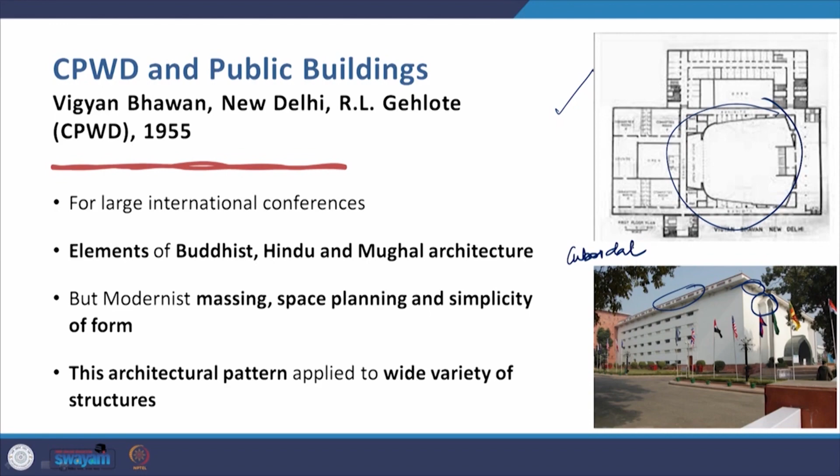So here in this example, the large entrance of the Vigyan Bhavan is actually in black marble and glass, and it's so obvious that it has been derived from the Chaitya Griha, the entrance to the Chaitya halls in Ajanta. So this horseshoe shaped design is directly imitated here, or in a sense interpreted in modern materials to form the entrance of the Vigyan Bhavan, and this single Buddhist element is there in the facade.

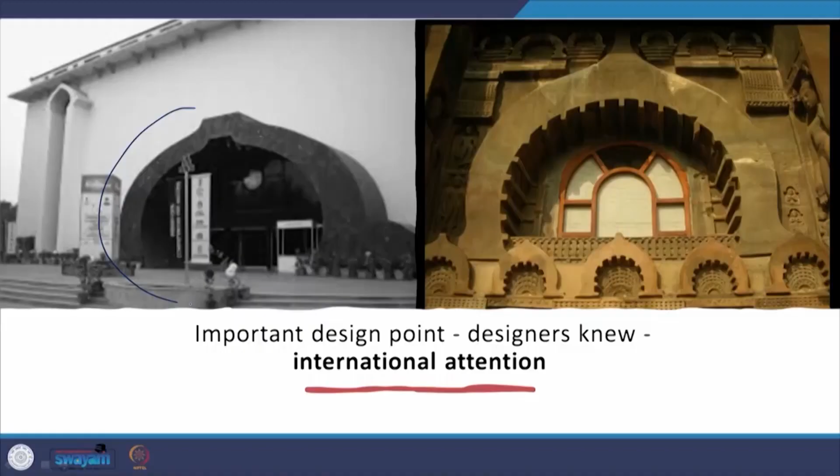Now this is a very important design point, and the designers deliberately implemented it because they knew that this conference center would become a hub for international conferences, and thus it would be able to draw international attention with this very iconic entrance. And so the building is not truly integrated. Its envelope, that is the exterior facade form of the building, is different from its interior.

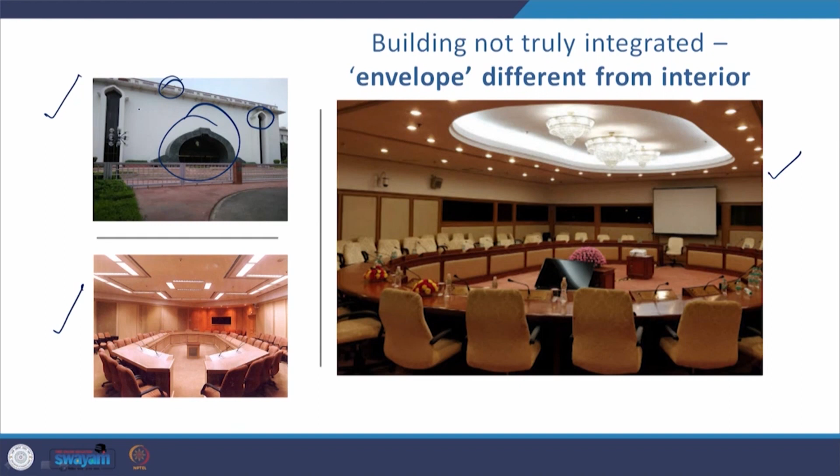When you look at the interior, it is very high tech to meet the requirements of a modern conference facility, but on the outside you have, for example, the entrance way from the Chaitya halls, or the top part of this long fenestration from Mughal architecture, and the jali work here in the parapet and the brackets beneath it.

So they could apply these traditional elements in the facade, but traditional planning could not be carried on inside, because the building itself required a modern spatial organization to meet modern requirements. So there was a disconnect between the way the building appeared from outside with these traditional elements, and what it was on the inside, which is completely modern. True modernism would avoid this disconnect between exterior and interior.

The building would speak the same language both in its form and in its inner space organization and planning and massing. This building speaks one language when it comes to its massing, because the massing is modernist. It is a simple cuboidal mass to the extent that it is a white planar cuboidal geometry, but then it has these traditional elements attached to it, and it is using conventional materials that have been used to erect this building, because such a large conference facility or an auditorium is simply not possible without frame construction, in this case RCC.

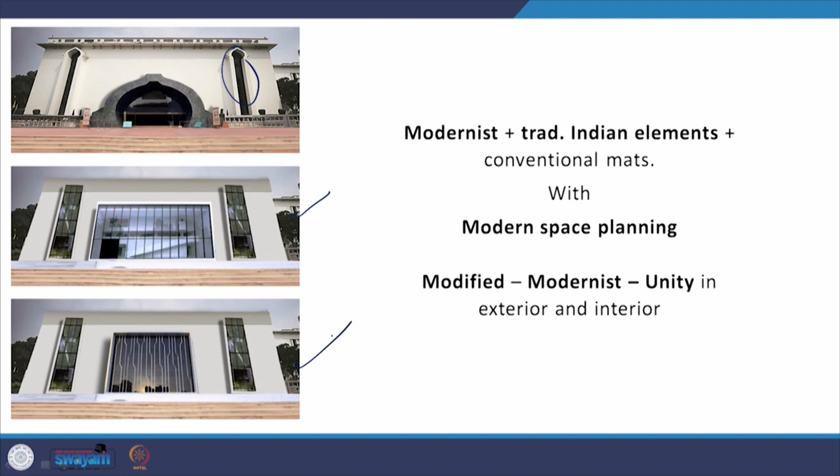Now what we did was that we tried to see if we changed this outward appearance, we changed the look of the envelope, so we modified it, and thus we gave it a kind of a modernist appearance in order to bring in a unity between the exterior and interior. So if I was in the classroom with you face to face, I would ask you, do you think that this change is bringing that kind of unity required between the exterior and interior?

Of course, because this is just the envelope, many permutations and combinations are possible. You can go in for an all glass facade as you would do for a modern 20th, 21st century building. You could even play with the form and make it even more dynamic in its appearance. You could do that because the plan itself is not being touched at all. It remains intact, only the outward envelope is changing.

So there are many modern cuboidal buildings today where not a lot has changed with regard to the internal plan layout. If free plan organization came in the beginning of the 20th century with modernist architecture, it has pretty much continued to be the same. At least from whatever little reading that I have done, I do not find that there has been a massive shift in the way buildings are planned in terms of space organization over the past 100 years.

There is no such radical idea that you see, except for a few that came in with high-tech architecture in the 70s and the 80s with the works of Richard Rogers, Renzo Piano and Norman Foster. Certain critical ideas that Norman Foster gave us for the Stansted Airport, for example, completely changed the way an international modern airport is designed into a single envelope design.

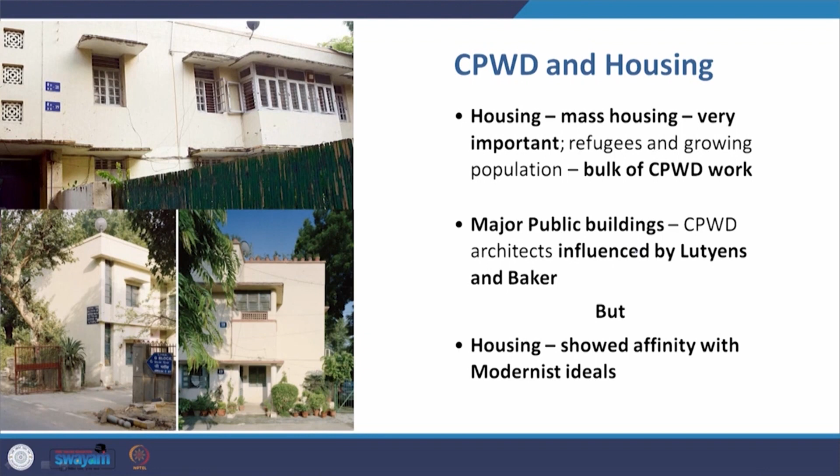Now the other section where CPWD made a big contribution was in housing. Mass housing was important because refugees and growing population formed the bulk of CPWD's work in the early years. The major public buildings, as I just mentioned, were influenced by Lutyens and Baker, but in housing they showed great affinity to modernist ideals. Housing, wherever they built in Delhi, for example, did not have any addition of any traditional element. They were simple cuboidal blocks in the modernist form.

So these houses in the government housing of Delhi, row housing, and the enclaves being built by CPWD, were not meant to be architectural statements like the Weissenhof Siedlung project that was planned and executed under the leadership of Mies van der Rohe, with many architects participating. I will show you what the project is in the next couple of slides.

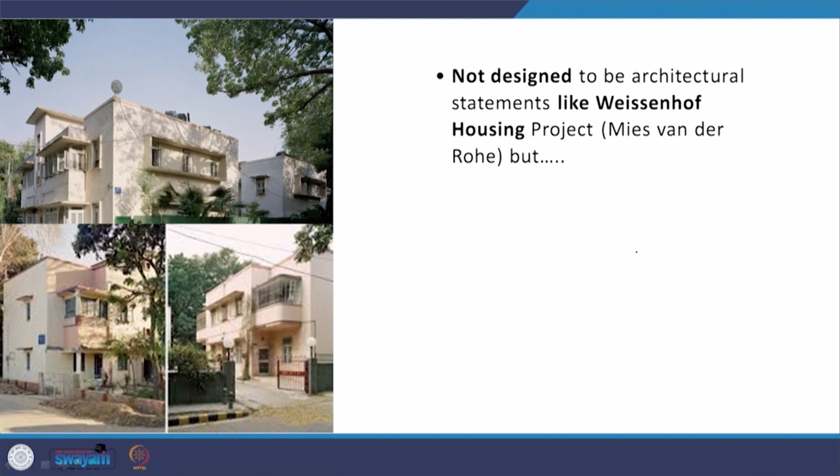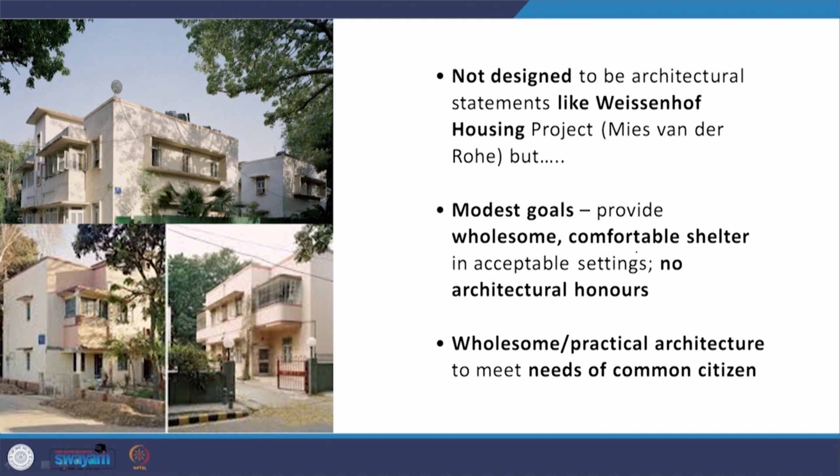But the modest goal of the CPWD was to provide a wholesome, comfortable shelter in acceptable settings, particularly with regard to climate, and there was no desire for any architectural honor. The desire was to provide adequate housing, the housing that was needed by Indians at that time. So this was a practical, wholesome architecture to meet the needs of the common citizen.

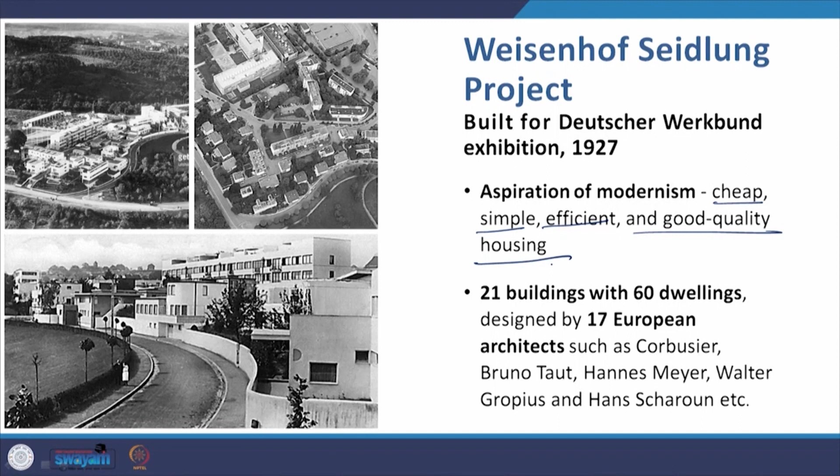And this project had variation in form. The buildings were different from each other in form. This is a work by Corbusier, for example. This is the housing block by Mies van der Rohe, for example. But they had a standard design language.

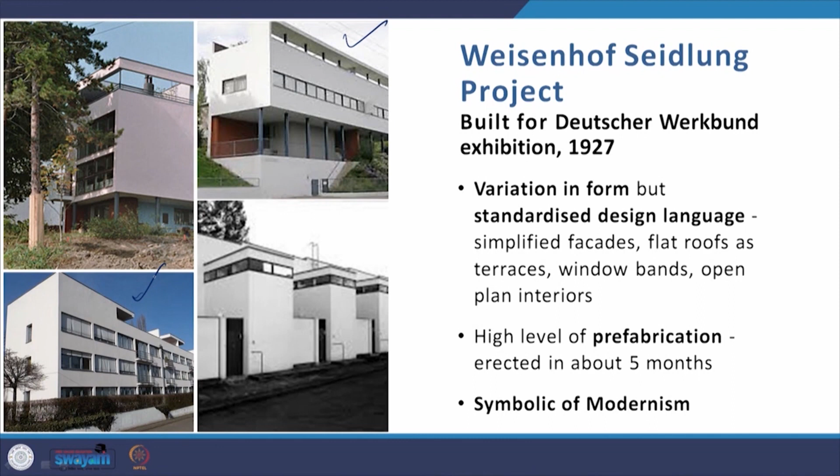All of them had this white planar cuboidal geometry with sharp edges, for example, simplified facades, flat roofs to be used as terraces, window bands or what Corbusier called ribbon windows, and a free plan interior layout. There was also a high level of prefabrication use, which was another thing that Corbusier and the architects were pressing for, and this got erected in just about 5 months, and it was emblematic or symbolic of modernism.

So I'll give you a picture to try to show you the difference between what the Weissenhof Siedlung was and what the CPWD housing was. For example, if you go to a high class restaurant to have food, it's not just the flavor, it's also the way it is presented to you. It's a statement. The Weissenhof Siedlung project was a philosophical statement about modernist architecture and its approach to housing.

Whereas this is your ghar ki dal and roti, which is home cooked wholesome food, which is not meant for anybody's honor. It is meant to give you a good, nice, nutritious meal, and that is in a sense what I want to say CPWD was doing, a nice wholesome housing to meet the needs of the common citizen.

On the other hand, there was also the work of the industrial city, Cité Industrielle by Tony Garnier from 1901 to 1904. We will not be studying the organization of the Cité Industrielle, but the entire city layout, the way the greens have been organized, the way the houses have been organized, they are simple cuboidal mass blocks. Corbusier and Gropius were both influenced by Tony Garnier, and we also see the impact of this industrial city in the Weissenhof Siedlung project.

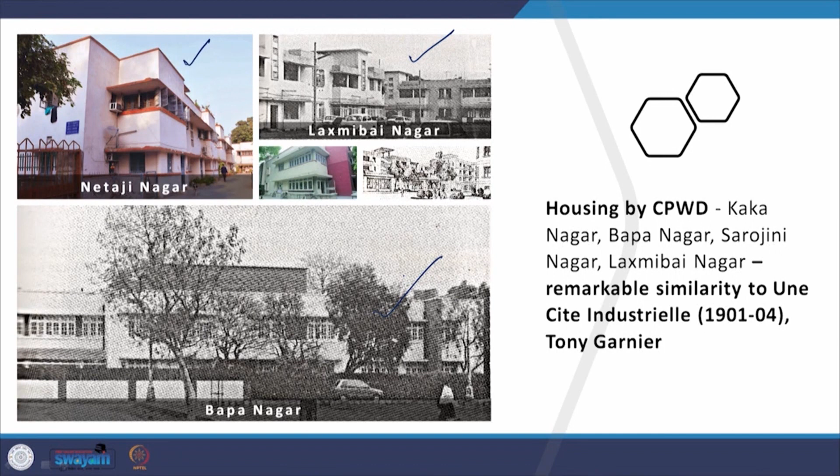Now we see the same impact in the housing by CPWD, whether it was in colonies like Kaka Nagar, Bapa Nagar, Laxmibai Nagar, Sarojini Nagar in Delhi. Those of you who are from Delhi or been to Delhi know these places. These are known colonies in which the government employees and officers live, for example, Netaji Nagar, Laxmibai Nagar and Bapa Nagar, and they bear a remarkable similarity to the industrial city by Tony Garnier.

But after the 1960s, CPWD, PWDs, DDA, HUDCO, NBCC, all of them have shifted more towards high density housing. One of the early beginnings was made by CPWD in the work of Habib Rahman in the housing in RK Puram. This is the one, and others followed throughout the country. It has a similar appearance throughout the country, and a modernist siting principle: rows of tall buildings or multi-storied housing rather than enclaves, which was what CPWD was doing earlier.

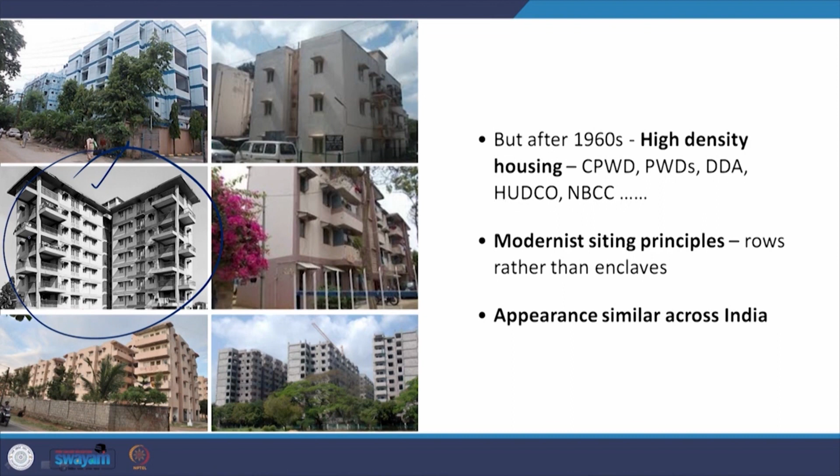These were enclaves, or in simple words in Delhi, you call them colonies, and here you have row housing or tall apartment blocks, and this is carried on into the 21st century. Now a lot of private developers are there, and the latest developments taking place in Gurgaon, Bangalore, Pune, Lucknow and other parts of the country, as I showed you in the introduction slide, are all coming up in this high rise apartment format.

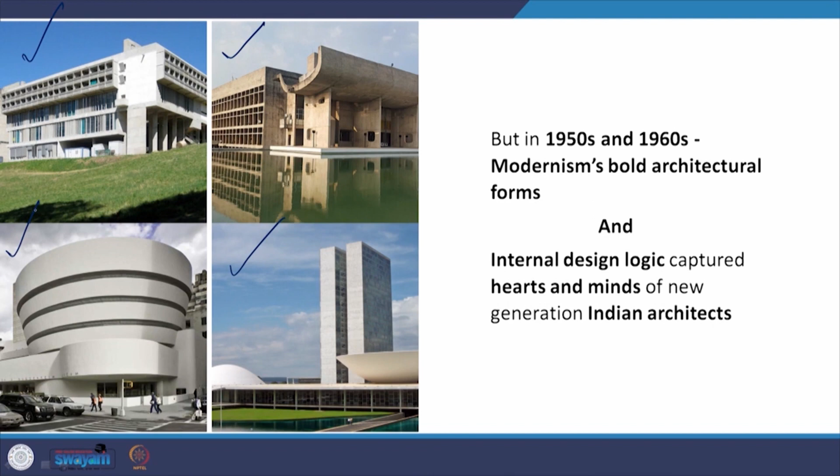Going back to this period, in the 1950s and 60s, modernism's bold architectural forms and internal design logic captured the hearts and minds of this young generation of Indian architects - whether the brutalist example of Monastery La Tourette in France by Le Corbusier, or the General Assembly building in Chandigarh by Corbusier, or the work of Oscar Niemeyer in Brasilia, or the Guggenheim Museum in New York by Frank Lloyd Wright. These international buildings, the marriage and harmony between exterior and interior, the overall organization, was greatly appealing to Indian architects.

We'll come back to these works later. Now, the first 2 groups, the one that evolved to a modernist approach and the one that grew out of Art Deco, they set the background scene. Whereas the third group, these young Indian architects studying abroad and coming to work in India, set the intellectual pace of the way Indian architecture should grow and become during the 1950s to the 1970s.

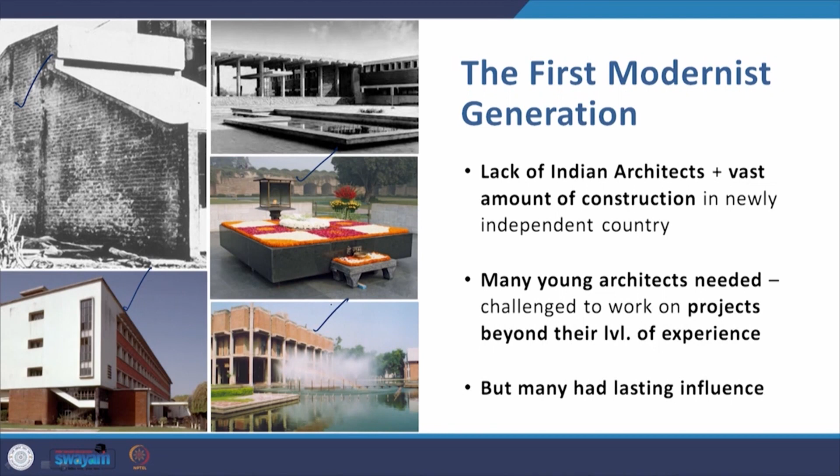And designed some of the most iconic buildings of India that continue to remain amazing examples of architecture even today, whether it is an experimental tube house by Charles Correa, this Atira building, the institute building by A.P. Kanvinde, or this Gandhi Samadhi by Vanu Bhuta, or the library of IIT Kanpur by A.P. Kanvinde. Many of these buildings continue to have a lasting impact upon us - they continue to teach us about architecture.

So the first modernist generation, and the places where they studied, just to give you a glimpse: A.P. Kanvinde, he studied at Harvard. Charles Correa, he studied at Michigan and MIT. Hasmukh Patel, he studied at Cornell.

Nari Gandhi studied at Taliesin under Frank Lloyd Wright, and others who studied with him were M.M. Rana, and also Gautam Sarabhai and his sister Gira Sarabhai. Then there was Jhabwala, C.S.H. Jhabwala, who studied in London, and Habib Rahman, who studied at MIT, and Pilu Modi, who studied at the University of California, Berkeley.

So all these people were the first generation of modern Indian architects. They learned modernism in Western classrooms, predominantly in the US, and brought these concepts and ideas to India. They were influenced by the new architecture of simple solid blocks without ornamentation, clean structural systems, and large fenestrations.

And also an architecture that was free both from the historical and the colonial past. The philosophy behind modernism, to look forward into the future rather than looking back into history and historicism, was the same concept they brought into India.

And so it was a diverse group, but they were unified in a number of ways. They worked for major architects abroad. Habib Rahman, for example, worked for Lawrence Anderson and for Walter Gropius, and Charles Correa worked for Minoru Yamasaki, who designed the original World Trade Center buildings that were destroyed unfortunately in the terrorist attack on 9/11.